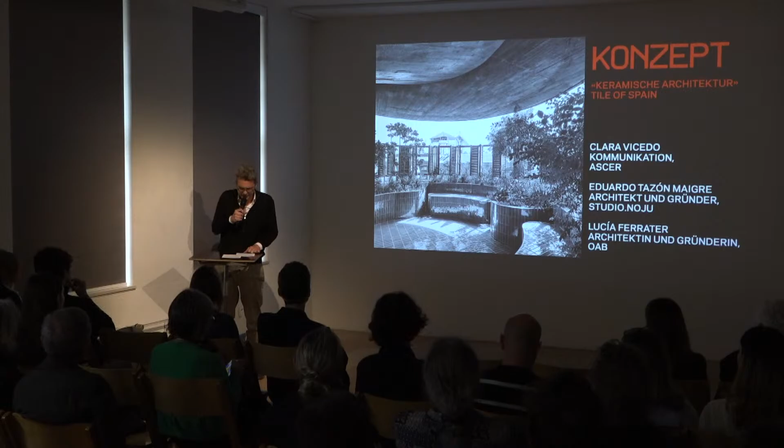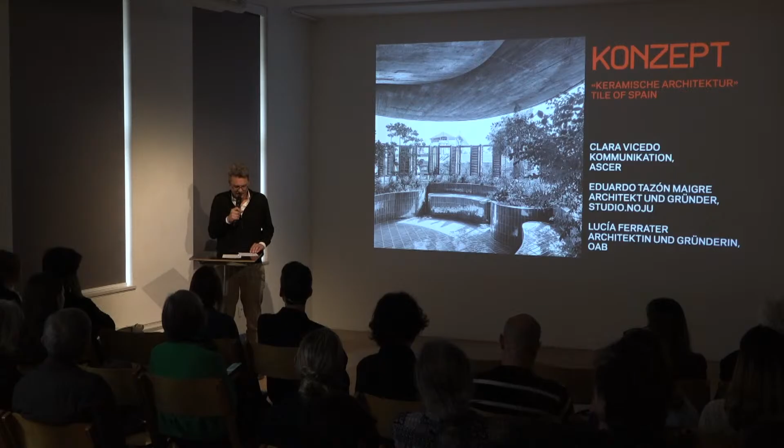So these are the two offices. Before I hand over to Eduardo, I want to welcome Clara Vicedo, who is responsible for communication at ASCER, the foundation that covers all the companies from the ceramic industry, and she will present ASCER quickly.

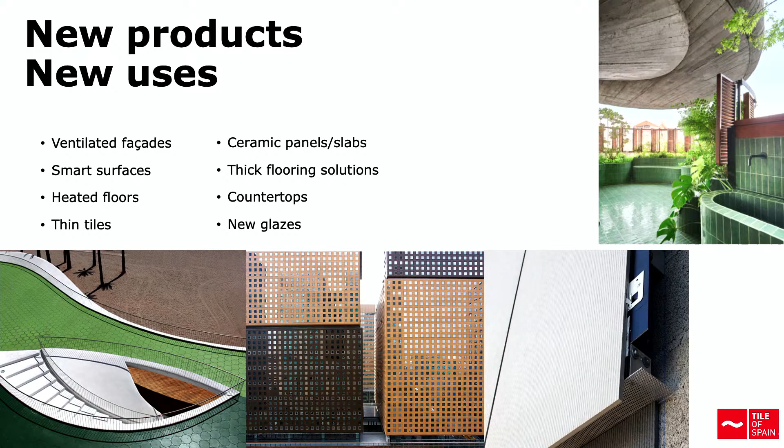The Spanish ceramic tile sector boasts a long tradition linked to an innovative industry and cutting-edge designs. Thanks to continuous investment in innovation and research, Spanish ceramic tile companies offer a wide range of products, from the very tiny mosaics to long slabs that can reach 3 meters long.

Without forgetting the special pieces of extruded ceramics or even the double thick tiles that you can lay on the floor directly. Depending on the manufacturing process, Spanish ceramic tiles can be used in interiors, exteriors, urban spaces, facades, countertops. The choices are endless for architects and designers.

Designers and architects hold ceramic tiles in very high regard, thanks to their versatility and beauty. Even though ceramic tile is one of the oldest materials in the world, it continues to impress people, to impress architects and designers with its potential and capacity for experimentation.

Related to this, I want to present the Tile of Spain Awards that we have been organizing for 23 years now. The awards recognize the best projects, national and international, that best use Spanish ceramic tiles.

These awards every year have a prestigious jury. We have had Carlos Ferrater twice as president of our jury. Last year we had Carme Pinós, and two years ago we had Herzog as president of our jury.

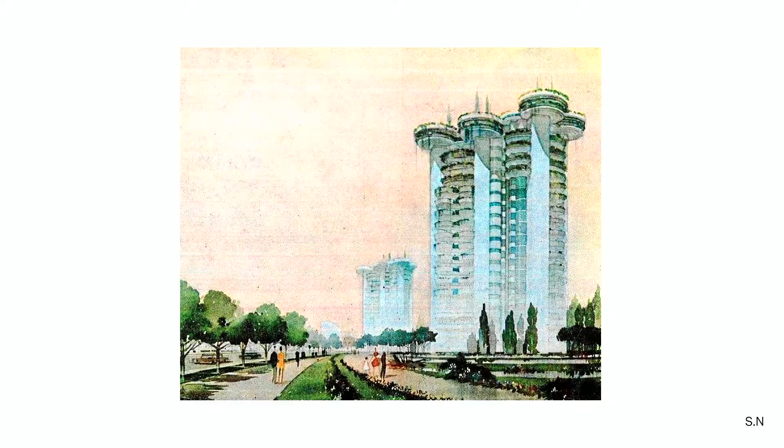Torres Blancas is a project which translates to white towers, which are not white, and they're not two, they're just one. Torres Blancas is a project by Francisco Javier Sáenz de Oiza. It was built between 1963 and 1969, and it sits in the center of Madrid, right at the old entrance of the city when coming from Barcelona.

It was a very fascinating project at the time because it was very forward-looking. The architect envisioned this project as an extension of the linear city, like a vertical extension of that typology of city, like the garden city going into its vertical axis.

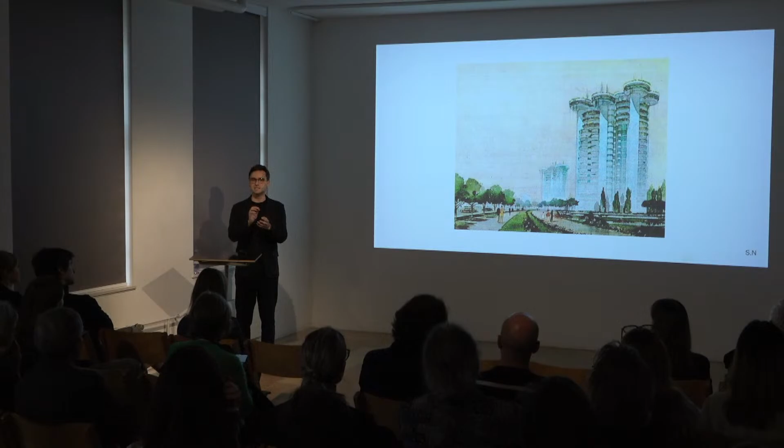We see this watercolor, and it's interesting because it was made to convince the city that this was a plausible project, that even though it was very utopian at the time, it still had the city's best interest in mind, in this new model of condensed city, a vertical hybrid of residential and commercial program. This was the watercolor that convinced the city.

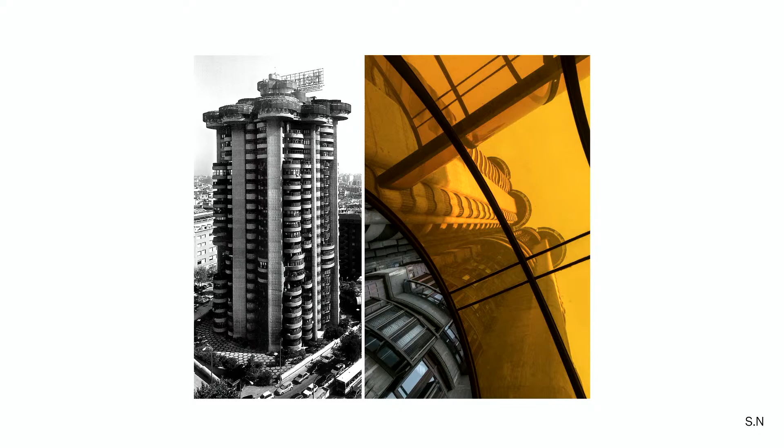Of course, you can already see that the original plan couldn't fully come into fruition because construction costs of such an experimental building were very high. The building is not just a landmark because of its architectural mastery of all the crafts and design—it was one of the first reinforced concrete projects built in Spain. So due to the experimental nature of the construction system, and also the formality of the building, it was very unique.

Construction costs had modified a lot the way that the project came out at the end. But even with all of these constraints, the project was extremely utopian and forward thinking, and a lot of the things that were planned actually came into fruition.

The architect envisioned this building—this is a quote from him explaining this idea of communal living, having all of this public program belonging to the tower. You could have a daycare center, a chapel, shops, restaurants, and a lot of those uses didn't end up happening because the space had to be leased to make it more financially profitable.

But two of the main ones, the swimming pool and the restaurant, actually did happen. There's a lot of architectural detail in the floor plan that talks about this idea of communal living—even the way the project was publicized at the time was extremely interesting and forward thinking. Let's remember this is the 1960s, and the idea of a mixed program in a tower now seems normal, but back then it was very forward thinking.

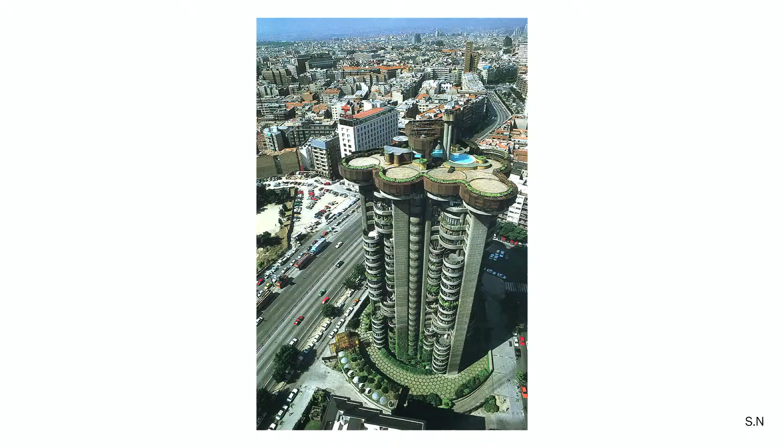Even the restaurant had its good run, like a decade or so. It was the Roberto de Nola restaurant, very high-end, exquisite cuisine, with 360 views of the city, which was very remarkable at the time. The interiors of the restaurant were even designed by the architect himself.

You can already see this formal language in the ceiling with this kind of reflecting paint, already transmitting the exterior language to the inside. Interestingly, one of the most fascinating facts about the restaurant is that it was able to send food to all of the apartments via a dumbwaiter.

All of the apartments had this tiny kind of dumbwaiter door, and they would be able to call the restaurant—again, 1960s, 1970s—and ask for a chicken and have it delivered down to their apartments.

It was very utopian because, when you think into the numbers of it, it was hard to serve the entire restaurant guests and also perhaps 100 residents at the same time. One reason it didn't extend its lifespan is because there wasn't a plan for its own elevator, so all of this public use of the top floors was very conflicting with the tenants of the building—they had to share the same 2 main elevators to access the residences and also the public program.

The swimming pool is still one of the highlights of the tower—very unique, great views, and probably one of the coldest waters you can find in a swimming pool in Madrid because it's very high up. But nowadays one of its main problems is maintenance costs, so it's important to highlight the importance of the tower and reclaim its importance as part of the architectural heritage of the city.

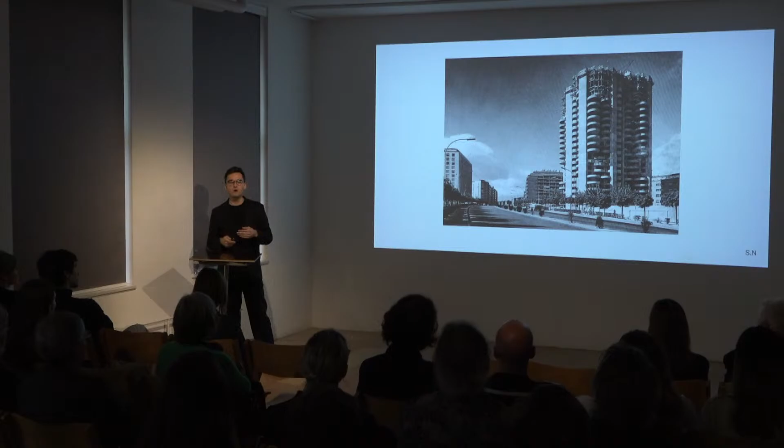During its very costly construction, a lot of changes were done to the floor plan layout. Initially there was a plan to have 16 units meant to be duplex apartments—400 square meters, 2 stories—and only 8 of them happened, because as they were building the tower they realized they needed to make it more financially viable, and substituted them for smaller 80 and 120 square meter apartments.

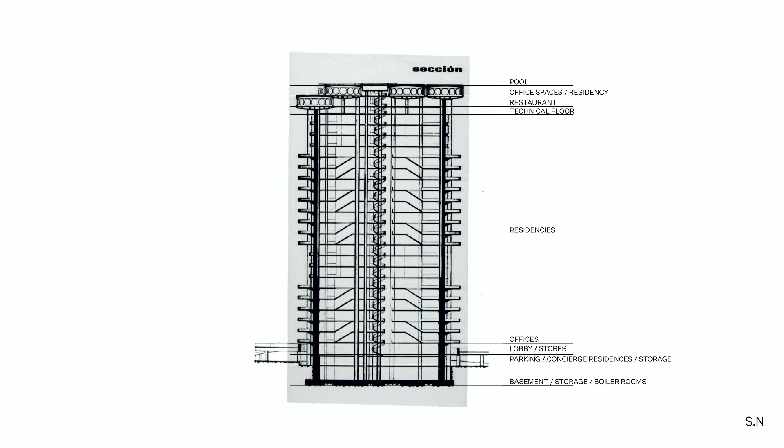Still, one of the most interesting aspects of the building is that it's able to condense different typologies of families and different typologies of apartments—going from the 80 and 120 square meter, which would be like an eighth of a floor plan, to a 200 square meter, which would be a quarter of a floor plan, or the 400 meter unit, which would take 2 quarters across different stories.

As you see in the section, the main residences would be like the core of the tower, and at the bottom, the lobby space—the way you enter the building—would be 1 floor down. He always said that to go inside the building, you first need to go down and then you go up. A lot of the public program was planned along the ground floor and also at the top floor.

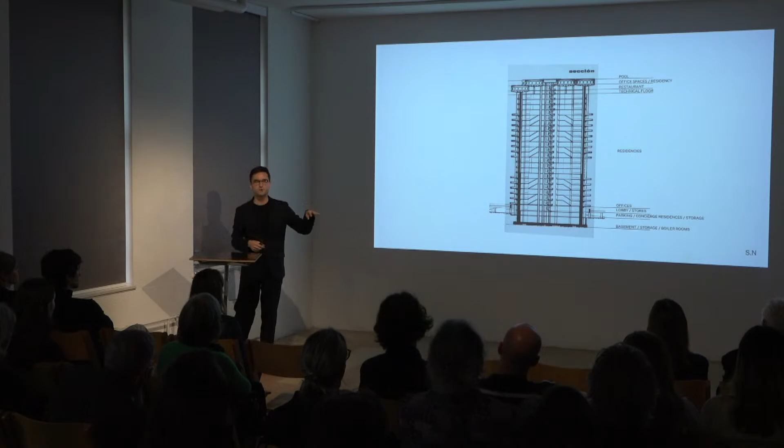Even though it looks very complex from the outside, the tower actually follows this simple diagram. All of the apartment units can be translated into an L shape that surrounds an outdoor space, because the outdoor space is going to be kind of the protagonist of these apartments.

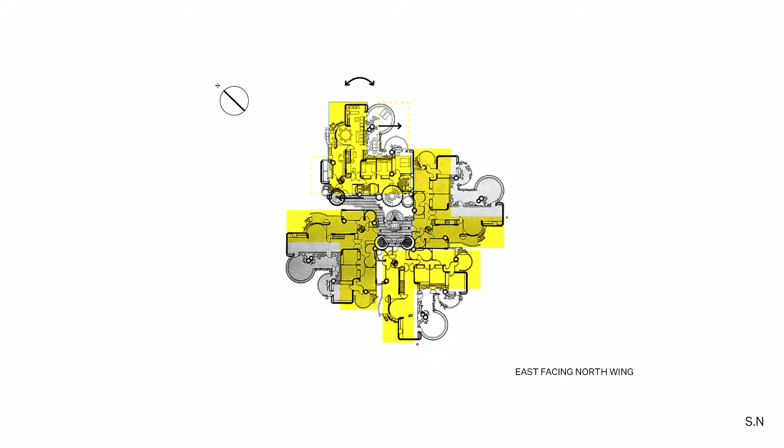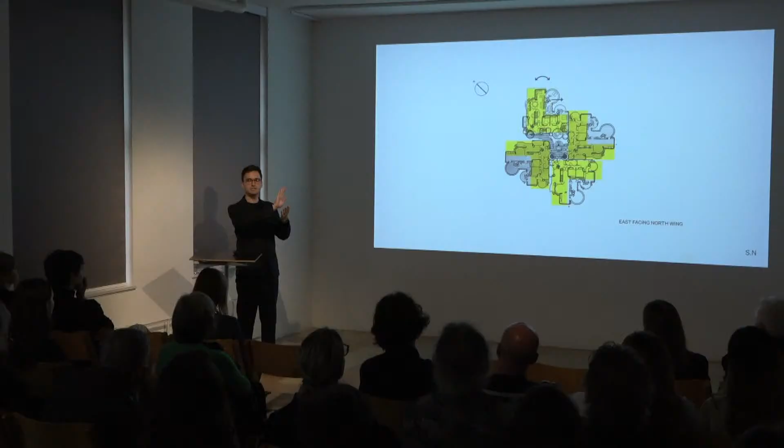As I said before, this was meant to be an extension of the garden city vertically, so the proportion of outdoor space versus indoor space was very important. This L-shaped apartment unit rotates from the east, south and west, but at the north unit, which is the one that we refurbished, it mirrors itself to focus the living areas towards the morning light of the east, and also leaves a bit of space for that corridor that leads to the fire escape.

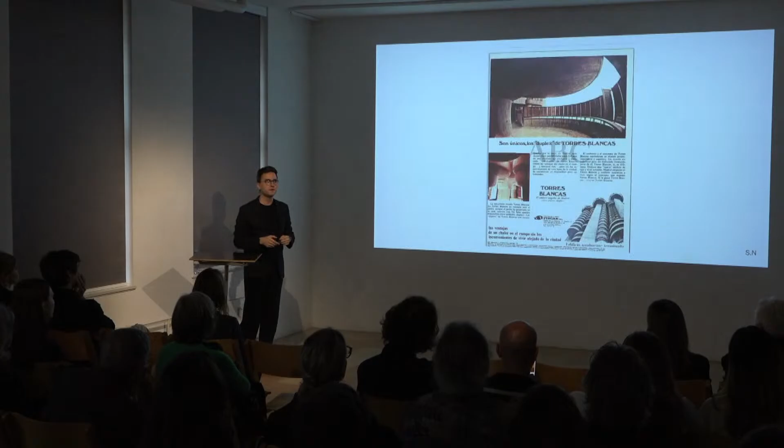Even at the time, these 2-story apartments were advertised as country town houses in the sky, because it was very unique to have such an amount of outdoor space for a flat in the city. Even nowadays, the amount of outdoor space these apartments have is still very unique.

Even the use of some of the materials chosen for this outdoor space really reminds us of those townhouses. This would be the only floor plan we were able to get before we started the project, because the project changed a lot during construction, and it's actually very hard to find as-built floor plans. So the unit, when we found it, was talked about as one of the apartments kept in its most original state—that was the premise of the initial floor plan.

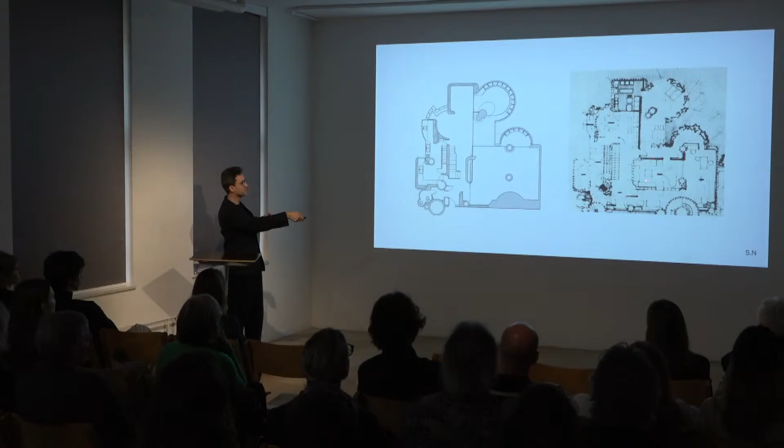But then we started to compare it to the original project, and we realized that all of that fantastic outdoor space that was meant to be the core of the house was completely gone. A lot of the terraces were turned into interior spaces, like this one here, where the line that separated the terrace from the living room was pushed forward, so you totally lose the connection between these exterior spaces. We already knew this was a heavily modified version of the original apartment, and these are spaces that were meant to be exterior.

This is the moment when we start to come to terms with how we can dialogue with such a strong architectural heritage. It's very nerve-wracking because it's a landmark in the city, especially for architects. We knew that we were not the nostalgic type, so preservation was not going to be a matter of keeping things exactly as they were 60 or 80 years ago. Instead, we wanted to focus on other values of the building and the apartment that are not necessarily listed within the preservation status.

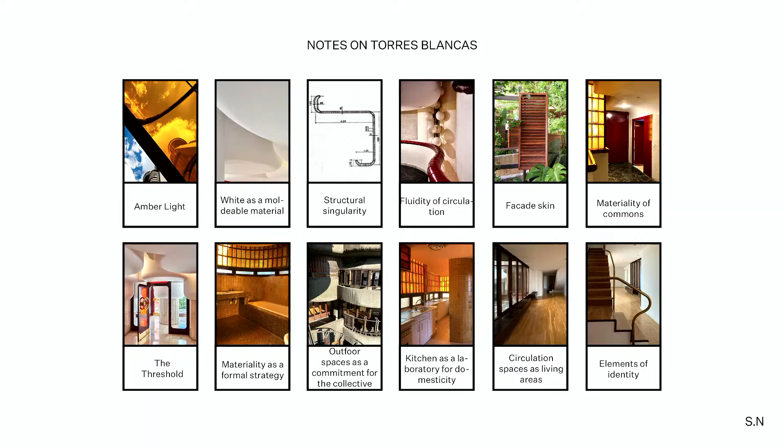Of course, we needed to comply with its grade 1 preservation status that protects the facade and the common areas, but there are a lot of values not listed within that catalog. For instance, the type of light that comes through into the apartment is very characteristic, and the whiteness is not just a color, but also a sense of thinking about a material as something malleable, which you'll see very well in the lobby space.

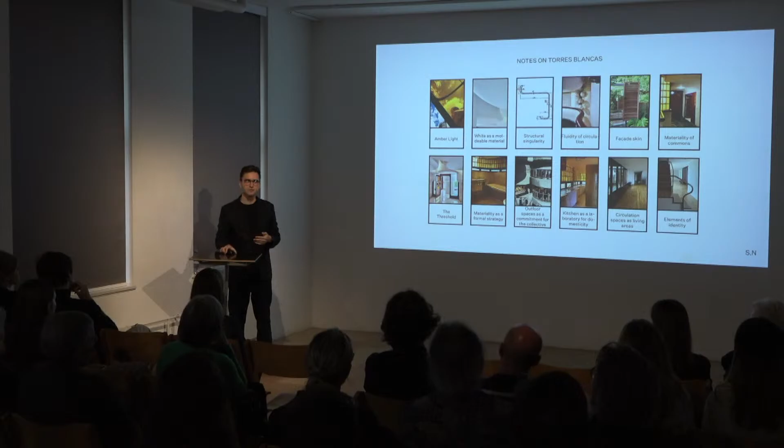There were all of these characteristics that we wanted to list, that belong to the essence of the building, and a lot of them were actually part of the architect's own narrative when he talked about the building. So rather than preserving everything as is, we wanted to have a new take on all of these existing values. We'll see that a lot of elements of the building will be transformed and reinterpreted in our proposal, without being nostalgic, but having a profound sense of respect for the building and the project.

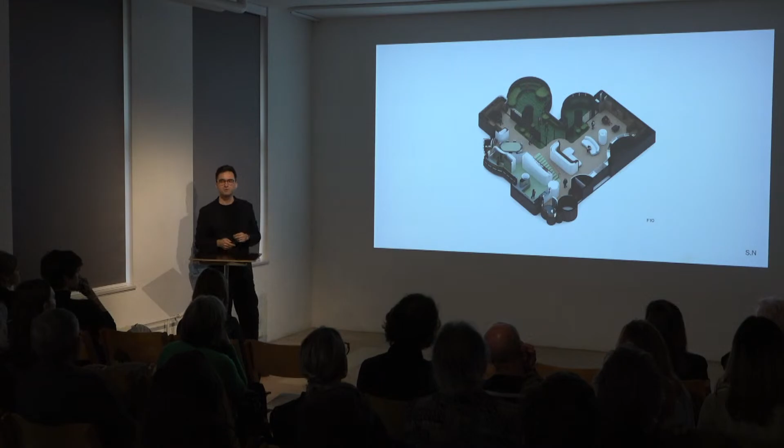So we're going to start diving into the renovation itself, starting with the ground floor. The ground floor layout and all of the program is still in the exact same place where the original architect planned it, and it was really well organized. Everything was really well proportioned.

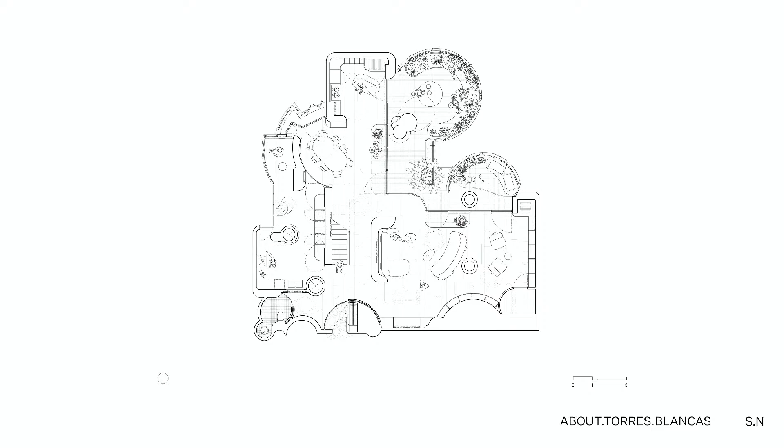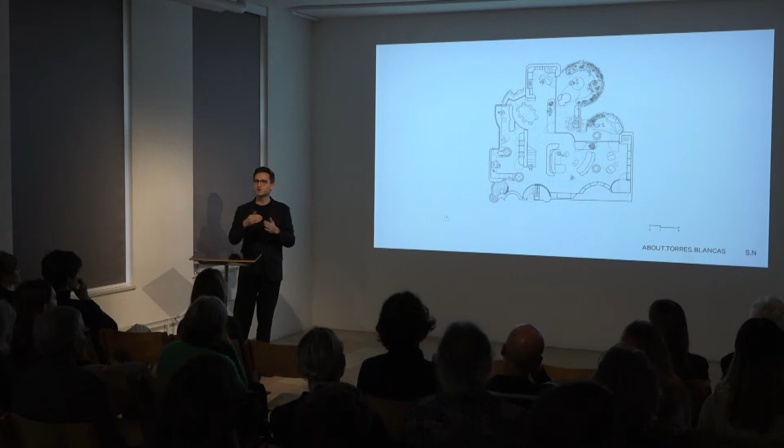So you think curved walls are going to be really hard to furnish, right? Where am I going to put my bed against a curved wall? Well, actually, there's a really logical and rational relationship between straight and curved lines, so whenever you need one, you're going to get a straight line.

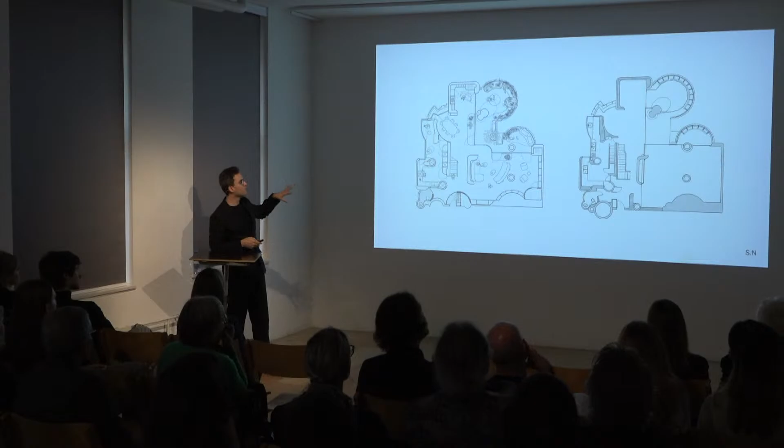And then we started to compare the existing state to what we wanted to conceive. So let's start diving into the project. The first space would be the entrance to the house.

The architect has this very interesting, convoluted but interesting quote about this idea of threshold, about how you design the architectural experience of entering a building, not just opening the door and you're already in, but something that had layers and different moments. For us, it was interesting to take this idea that already happens at the lobby space and, on a smaller scale, design a space that acts as a threshold dialoguing between the existing building and the renovation.

That's why we created this semicircle space that takes all of the visual cues of the common areas, such as this burgundy color, and even the floor is Segovian slate stone — we were able to find the original quarry where we could get the exact same stone. So we enter the house using the common materiality of the building as a way to dialogue between the building and the apartment.

There's a sliding curved wall that opens up once towards the apartment, but again, it's a bit of a threshold — it's not just walking into the apartment without any type of in-between. The next space that I'm going to talk about is the kitchen.

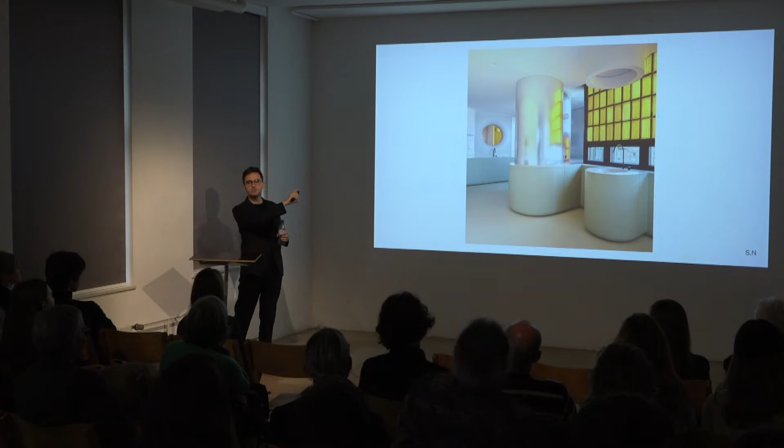One of those was to really experiment with materials, to achieve a formal language that resonates with the geometry of the building. You see the kitchen has this seamless resin floor that connects both kitchen spaces, and a countertop that follows the geometry of the existing structural elements. It's a beautiful floor plan, a combination of geometric shapes that are very willful but very intentional. So we followed this entire wall with the countertop.

The challenge was how to truly make this countertop seem malleable, in the same sense that the lobby space and other elements in the building seem like something you could softly push and mold. So using solid surface, we were able to craft this material so it could be curved in two directions, which was one of the challenging aspects.

Also, the baseboards are usually standardized aluminum solutions, but we wanted them integrated into the doors and into the design itself. Even the countertop edge is muted by a 45-degree angle. So just by designing that section, we were able to create this fluid object that goes throughout the kitchen.

This is the dumbwaiter I was talking about before. Some building tenants have it completely covered, some have used it as a library, but we wanted to preserve it and showcase the memory of that communal living, which is mostly lost now because the dumbwaiter use only lasted about 4 months. But it's still there with its original call buttons.

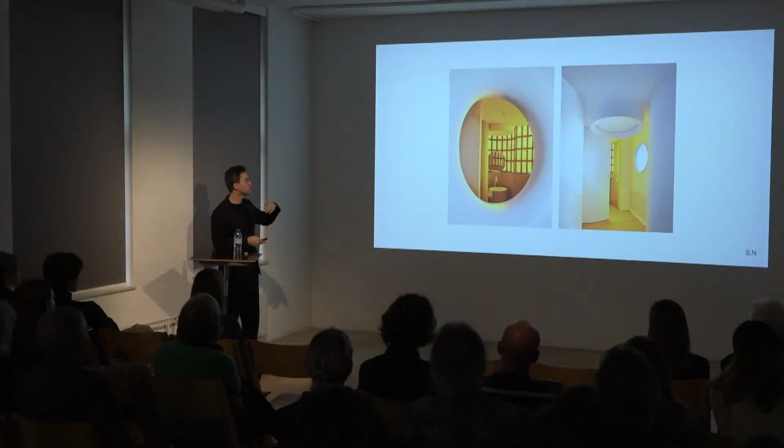This is like the image is reality, it's a beautiful light. So of course we wanted it to be part of the apartment. Previously all the service areas had no visual connection to the rest of the house, so we wanted to open up perforations and create this opening to frame that light and make it a protagonist once again. Even by using mirrored material on some of the kitchen walls, we're able to bounce back and replicate that amber light, making it part of the atmosphere of the apartment.

One of the debates at the time, with this indecisiveness about whether to open up the kitchen toward the rest of the apartment, was whether to isolate the dining room from the kitchen, the more conservative approach, or to open it up.

He ended up having the more conservative solution. So as a nod to his indecisiveness, we created this connection between both spaces with a sliding curved mesh door that somehow still visually connects both spaces and creates this sort of layered vision of both of them. Again, the connection between the kitchen and the rest of the house is highlighted and kind of cherished.

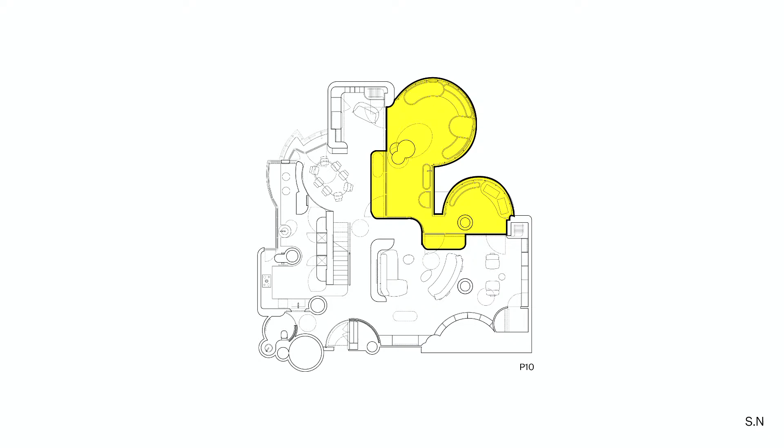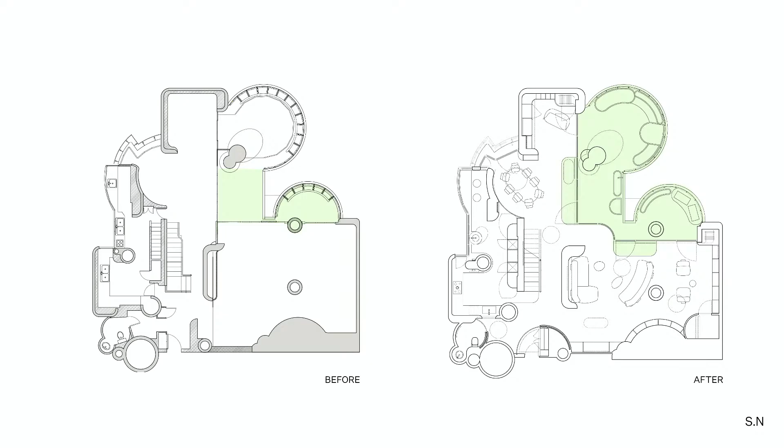And of course, then we move to one of the most important aspects of the apartment, which is the outdoor spaces. The architect even talked about these spaces as being like the core, the heart or the lung of the house, referring to the fact that these terraces should be covered in greenery. He envisioned the tower to be fully covered in greenery that stems from the terraces, so almost no concrete is left seen. But we encountered the fact that all of that space was gone.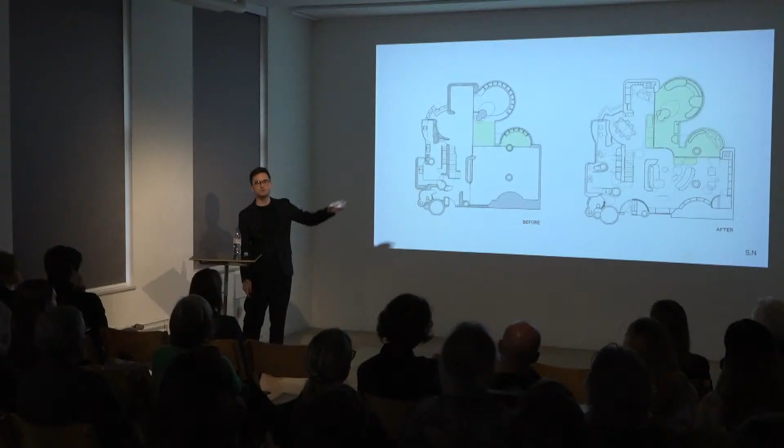We wanted to bring it back. This was kind of the state of those beautiful terraces - were completely given to the interior. Again, it was a common thing at the time, even nowadays, when it comes to real estate value - the more rooms you have, at least in Madrid, the more your house is valued.

And of course, these things are changing nowadays after we understood that outdoor space is much more valuable. So for the terraces, we really wanted to make something unique, something that stands out, not just keeping it as it was, but designing them as a holistic project, especially when it comes to materiality. Here we use these ceramic tiles of Spain, a beautiful porcelain tile that has this glazing that really reflects the lighting, and we created these planters and seating benches, again to highlight the formality of the space.

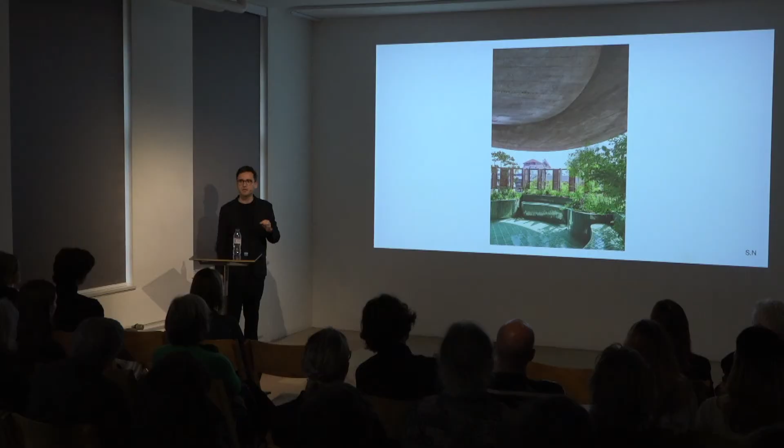This is kind of like a concentric meeting space, right? And we even used a lot of the plants that were suggested by the architect at the time he designed the building, so the plants would start to conquer the rest of the tower. This is very manual labor - each tile is placed by hand individually, and it's cut to shape. So it's definitely labor intensive, but for us it was important to make it so unique as to really claim its role as the heart of the house.

So all of the living spaces really open up towards that exterior. And you already see that the connection to the exterior doesn't stay just beyond the glass. Also the floor inside protrudes from the outside using the same tile and acts as a recipient of indoor plants, to change your plants in summer and winter. So the connection between spaces sort of blurs out, and that's the effect we wanted to achieve.

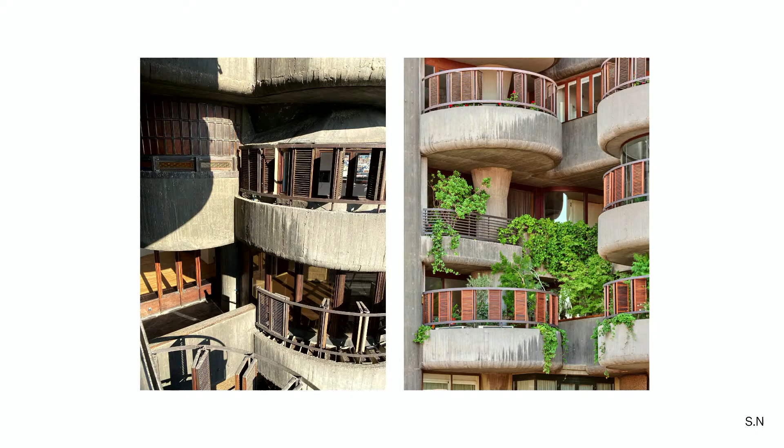This is what we found - this is the beginning of the recolonization by plants of the concrete. The rest of the floor plan is kept as a very open floor plan to truly highlight the fluidity that is a result of the very singular structural floor plan.

These in-between spaces are really trying to focus on creating that circulation. For instance, this connection didn't exist before, so it just ended up in a 90-degree angle wall. But we wanted to highlight the fluidity of the structural elements creating the circulation, so we opened up this curved corner using curved glass, and you see how the shape of that exterior space blends in towards the interior.

And all of the living spaces at the first floor are used inside of the open floor plan. We try to use wood as a way of framing certain spaces. So, for instance, in the living room, even though it's an open floor plan, the wood rises vertically and creates this backdrop for the sofa, for instance.

And then we created something that, again, wants to highlight one of these elements we thought was important, which we explained before - the amber light. This is another view of the living room towards the other side, and you see that we created this perforated paneling to disguise a lot of storage space.

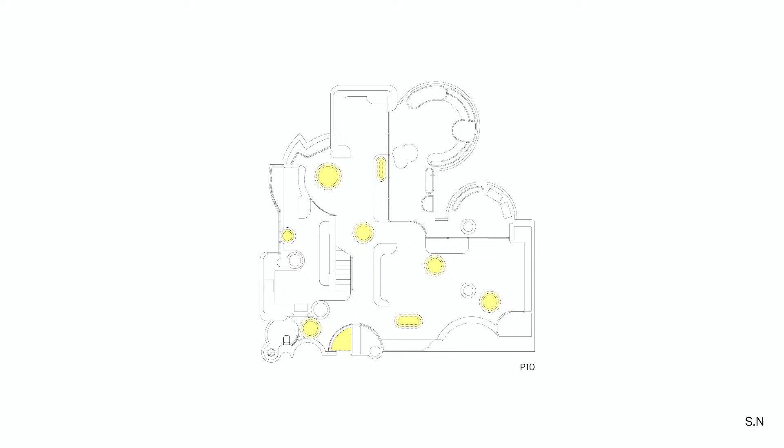Another nod to the building is creating these faux skylights that are a direct reference to the lobby space. The lobby of the Torres Blancas building is an absolute masterpiece, full of this cave-like plaster mold. The architect used to call them molars, because he created them after having a dream of having a lot of pain in his molars.

That's kind of the reference, but we see the image and think of it not just as formality, but also white again as something that's not just a color. In the white areas is where you see the material being transformed and molded. So that's when we started to think about these ceiling fixtures, which seem to melt from the material of the ceiling, as a nod to that idea we see in the lobby.

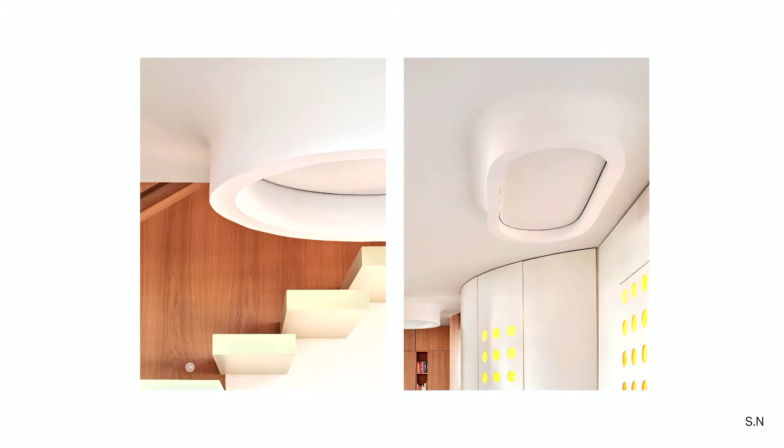And in this space, these light fixtures are meant to simulate outdoor lighting, the same temperature and intensity of light, to create the false sensation of having a skylight in a 10th floor apartment, which is right in the middle of the building.

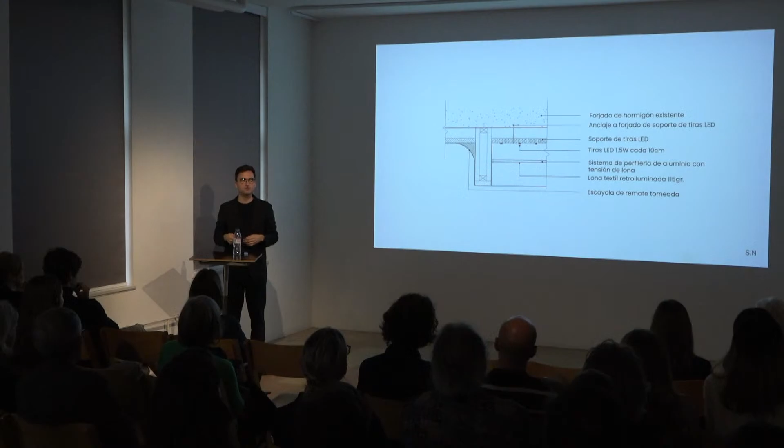But these were really a craft, there was a lot of craftsmanship behind it, from carpenters to lighting designers to plaster makers doing traditional plaster making. It was very challenging, but everything was needed to really create this effect.

Another nod to the building is its very distinguishable facade element, which is the wood shutters. The entire building, all of the apartments, have this layer of wood shutters, or mallorquinas, which is what we call them in Spain. And we wanted to reference those inside of the apartment as well.

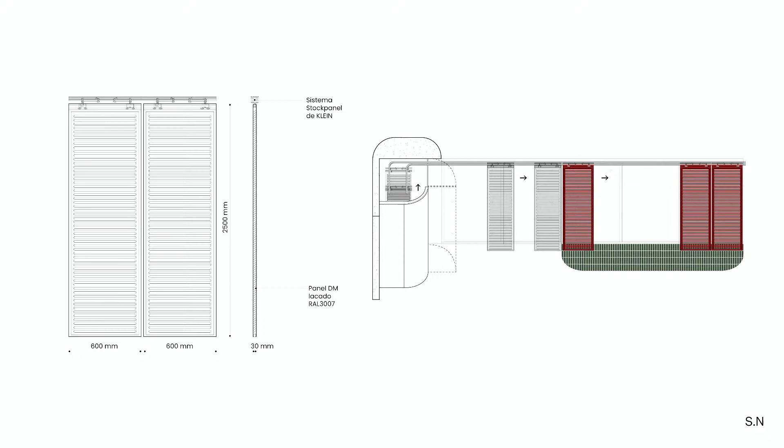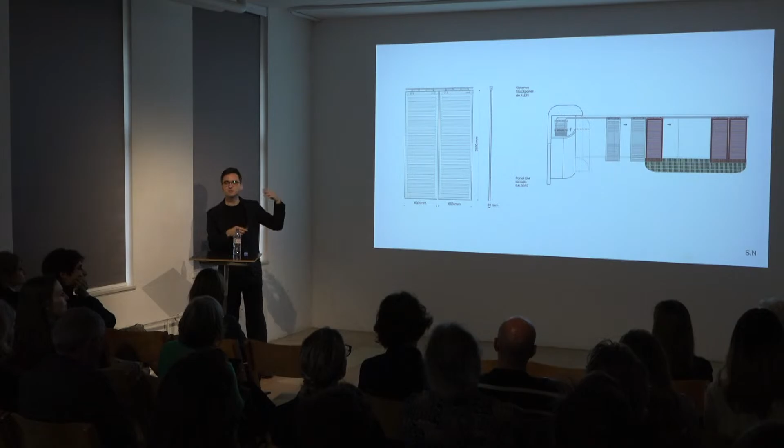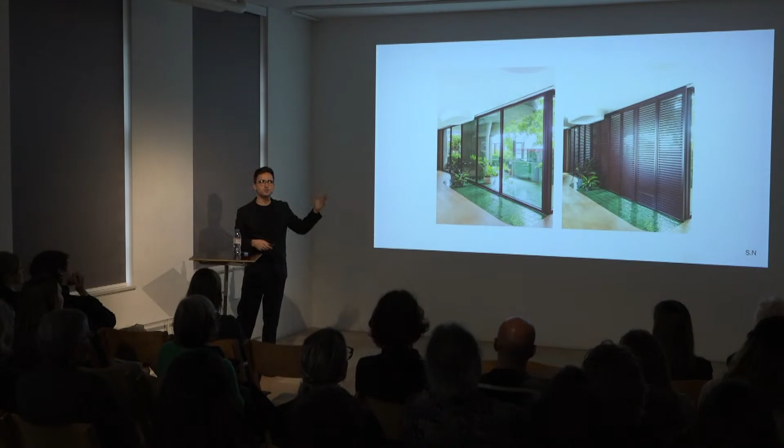So we created our take on those shutters. Instead of having curtains or just blackouts, we created this Mallorquina system inside that can be stored in hidden panels at the corners of the living rooms, using a rail system typically used in mobile partitions in big spaces. This references not just the wood shutters outside, but also reminds us of the original facade module, which was 60 by 60 centimeters. By opening up with all of this glass, we didn't want to lose that rhythm, so these shutters remind us of the scale of the windows back then.

Another small experiment is with the wood floor. The floor plan is an L shape, so when you have to choose the direction of the floorboards, it's not really clear, it could be both. So we opted for a very homogeneous looking wood that didn't distinguish too much between panels, and then we created these custom fake joints that resemble gestures from the floor plan of the project. This diffuses the directionality of the floor and adds another layer of complexity and richness to all of the elements of the project.

The staircase showcases the only element we kept from the original apartment, which is the handrail. Everything else you see is completely new. But the handrail seemed to have its own identity, and these polished brass handrails are used throughout the building. Brass is another one of the materials that are part of the identity of the building, and it's a direct reference that Oiza makes to one of his masters, Frank Lloyd Wright.

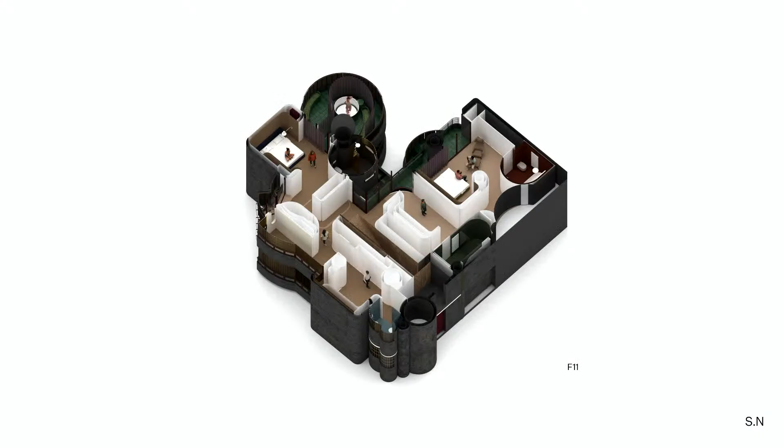Let's move to the second floor, which is where all of the bedrooms are. The layout actually comes from something the architect said about corridor spaces. Oiza said corridor spaces should also be living spaces — he wanted to promote the idea that you don't just have a hallway, that it needs to be part of a space that can be lived in. The truth is the layout he ended up doing, probably because of real estate value, ended up a very standard long corridor distributing to different bedrooms. So our idea was to go back to that original text Oiza wrote, to create a sequence of lived-in spaces that direct towards the main sleeping quarters.

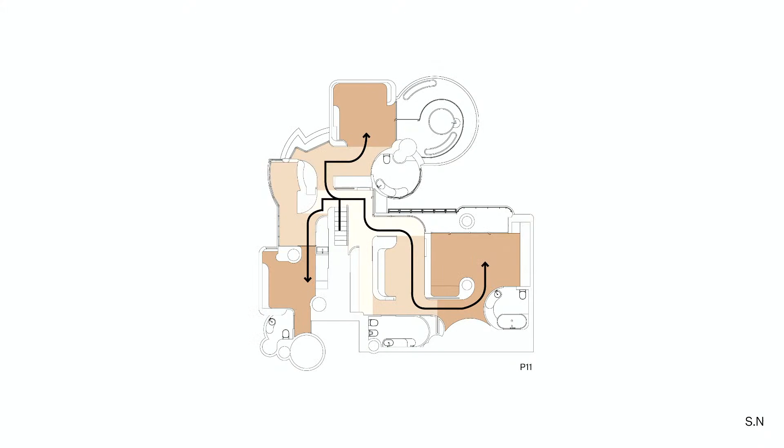So you walk through living spaces rather than just a plain corridor. For instance, this space acts as a day living room. It can transform into a bedroom because all of that paneling on the left is a bed that comes down, but it's also part of the walking area towards the rest of the house. These in-between spaces were important to us. This corridor originally had one curve — we turned it into four. It's about maximizing what was already there.

Even this nook that used to be where you hang clothes to dry, which seemed a pity because it's such a beautiful space, we turned into a small studio space that looks towards the city. It's really interesting because you only see the cityscape once you sit down, because the transparent openings are right at eye level when you're sitting.

And then, of course, we arrive through these intermediate spaces towards the main bedrooms. The house has two fixed bedrooms, using wood to highlight the backdrop and frame the beds.

And it has two of these versatile rooms — rooms that can be transformed easily into a bedroom, as a way of responding to different needs of the family. While it grows, you'll probably change — maybe you start without kids, then kids come, then kids leave. So in a way it's an adaptable house layout, a way to not always have four bedrooms in such a big apartment that always have a bed no one uses. It's important to think of that flexibility, and different types of families. Not everyone has kids — maybe they turn it into a workshop space, or a playroom, or whatever.

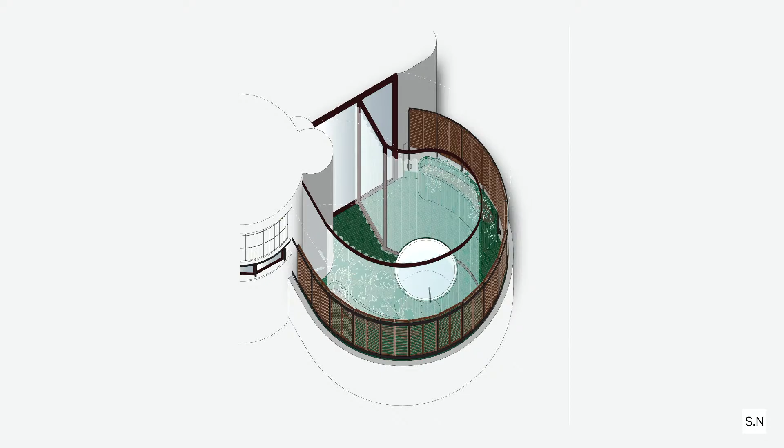The last space I'll discuss is the terrace from the main bedroom, which used to look like this, and now looks like this. We wanted to treat it as an exterior space, but also offer this in-between state of being an enclosed space with a very big bathtub, which you're able to close off with a very light curtain that resembles the green tiling we kept. The green tile had to be the icon of the outdoor spaces of the house. And again, the care in how this was placed made all the difference.

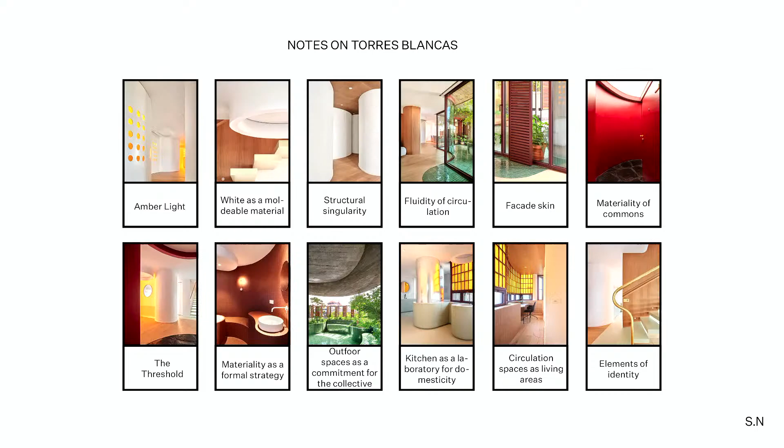We think we achieved at least the objectives we set for ourselves, which was to recover that idea of the tower being like a garden city, explored vertically and very lush. All of these ideas that were present at the beginning ended up being transformed and translated as a way to truly highlight our commitment to how important this building is. It's very nerve-wracking to intervene in such a landmark, but we wanted to showcase that the building still has a lot more years ahead. It's going to last for a long time because it allows for all of these modifications over time.

And we can stop the video whenever it's time. But yeah, I'd rather not see. Well, anyways... yeah, thank you. Thanks.

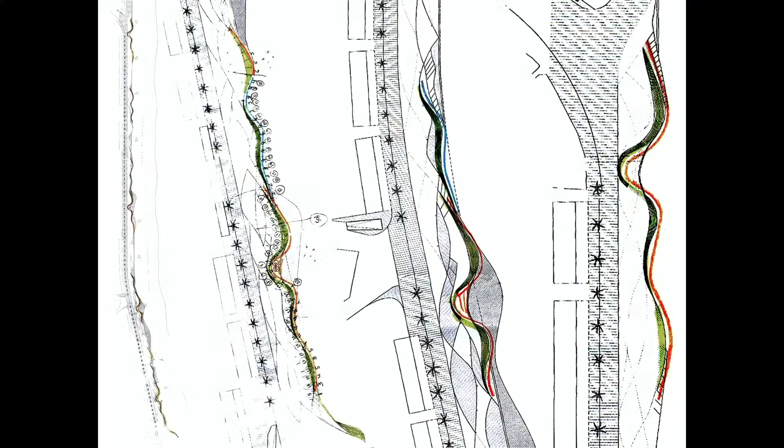These schemes come from an aleatory decision, but for the development project we had to establish fixed geometrical laws and modulation to make construction easier, and with a small number of molds and wooden frameworks we could combine them with each other.

The white walls are materialized in a concrete shell, a very thin shell 8 centimeters thick, reinforced with bar grids, fiber, and high-resistant and flexible mortars.

The promenade is structured in different layers: the structural layer that creates the perimeter line with the white concrete, the second is the texture layer with paving in different colors, and the third is the elements, the urban furniture, benches, hand railing, and the space of vegetation.

I would like to focus on the ceramic piece, especially designed for this project, and how a round shape tile has given the flexibility to adapt the surfaces to the topography and allows an isotropic space. Being circular does not emphasize any particular direction, which facilitates its placement by exchanging pieces of different colors along the braided pattern of pavement.

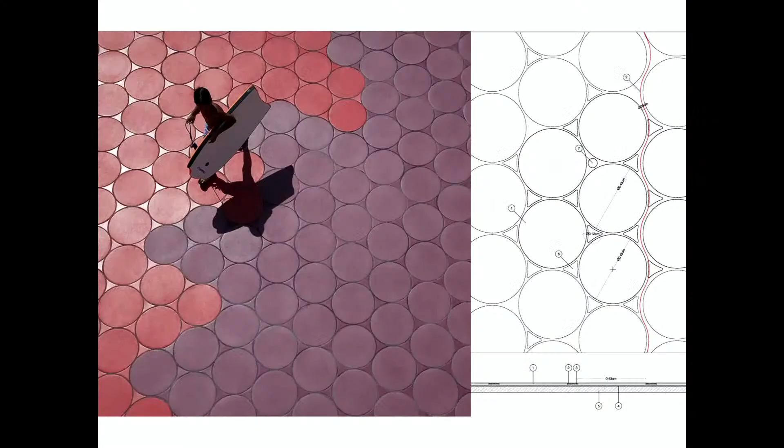We can see here the round piece. This color glazed stoneware floor was designed by Xavier Martí, one of the authors of this project, and was developed in collaboration with Alicer, Institute of Ceramic Technology, and produced by Keramia Company.

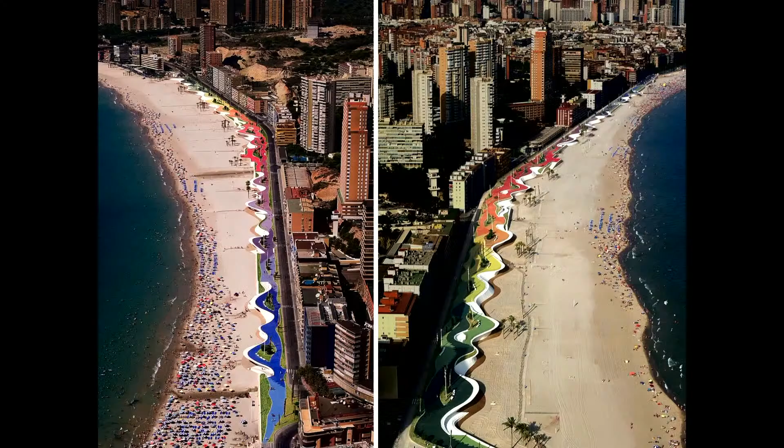The project subsumes three different essences within the organic forms of modernism: the forms of fractal geometry in nature, the latest building technologies, and avant-garde landscape design.

A new land-sea front is built, providing views towards the sea and beach from the upper level, and a new borderline is established, integrating the different circulation in its undulations and platforms, eliminating a barrier and constructing a place for people to be.

I can say also, for this project, the most incredible thing, and with projects above all these projects of landscape above all, is how a project can change the life of people, can change a place, and can transform it.

Benidorm has two beaches, west and east. The west was a very depressed beach, and no one went to the beach because all the shops in the front line were completely without business, without anything.

And this project activated all the life in this area. Benidorm, it's the beach, it's gold, it's the gold of the city.

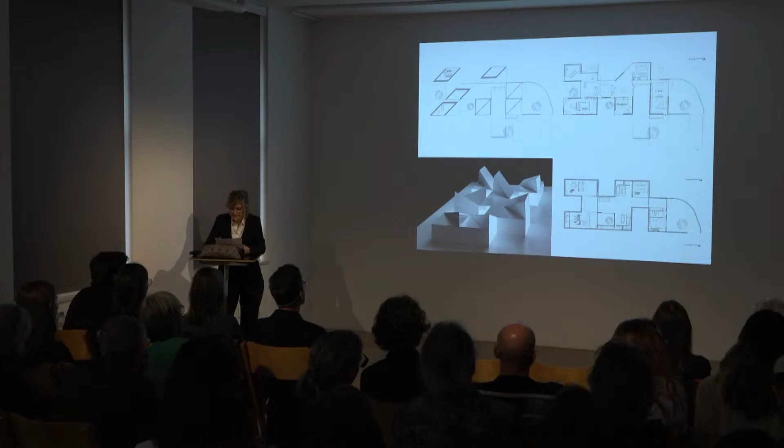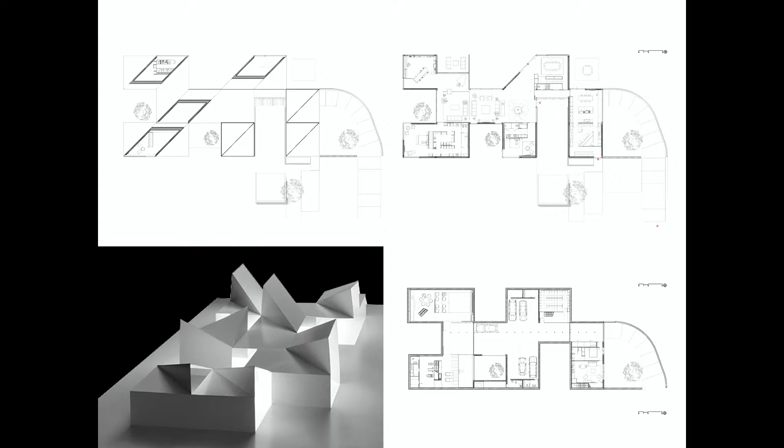Here you can see the floor plans. The ground floor contains the living, dining, kitchen, and two rooms for client and guests. I don't know how to explain it because you can see it more easily.

But every space of the house is totally linked to an exterior piece of garden, and this is very important—the garden comes inside the house.

From the inside, the diagonals disrupt the orthogonal layout, capturing views of the landscape and making the space more dynamic.

We can say that it's a house, but something else - it's many houses at the same time. It's more a pavilion. Here you can see the many houses. Japanese architects call it origami house, and now internally in the office we call it the origami house.

The connection of these two floors is not done through a main staircase, but 4 stairs connecting the different areas of the house. One stair connects the main room to the gym and swimming pool. The others go from the library to the cinema, or from the dining room to the wine cellar.

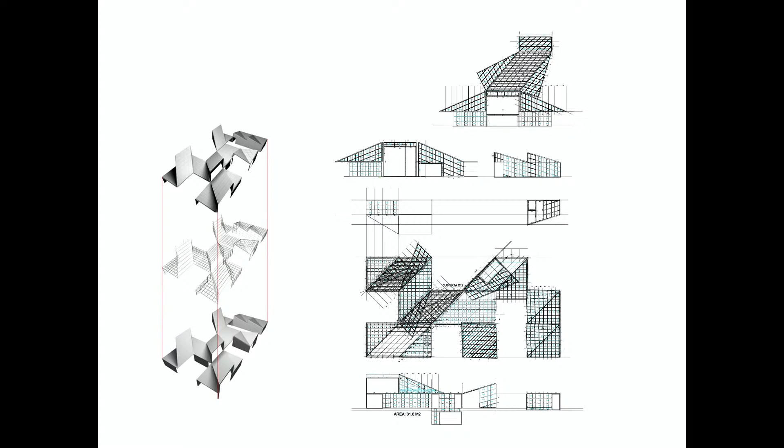All the slab, it's tension - post-tensing, it's post-tensing slabs. All the roof is a post-tensional slab. All of the roof, it's also, you can see a topography.

Then the third project, it's Roca Gallery, Roca Barcelona Gallery. We had conceived an institutional headquarters for Roca Company, a company that manufactures sanitary elements such as toilets, sinks, and also ceramic pieces. I think you know this company. The building had to be a flagship, and the architecture had to visualize the brand, advertising the values, the history, and the challenges of the company.

The assignment had to consider an institutional headquarters, a museum of the brand, and a platform for social events that also involves the business world. The architectural design is based on two essential ideas: its exterior appearance and the experience lived in the interior space.

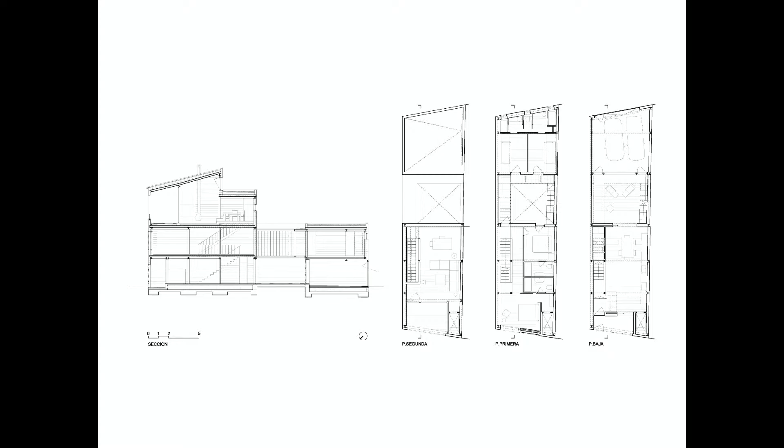The section is lower on the backside to improve insolation and ventilation to the courtyard, and the house faces north. The building in the back, the sun comes this way.

Inside, the house is distributed on 3 levels. On the ground floor, the house has access from both streets: a main entrance from the seafront, directly to the kitchen and dining room, and the patio and garage entering from the backside.

On the first floor are bedrooms, 2 interiors and 2 exteriors in the back building. The 2 interiors and 2 exteriors are connected by a hanging gallery, a hanging pasarela. On the second level there are the library, the living area, and a sheltered terrace facing the sea.

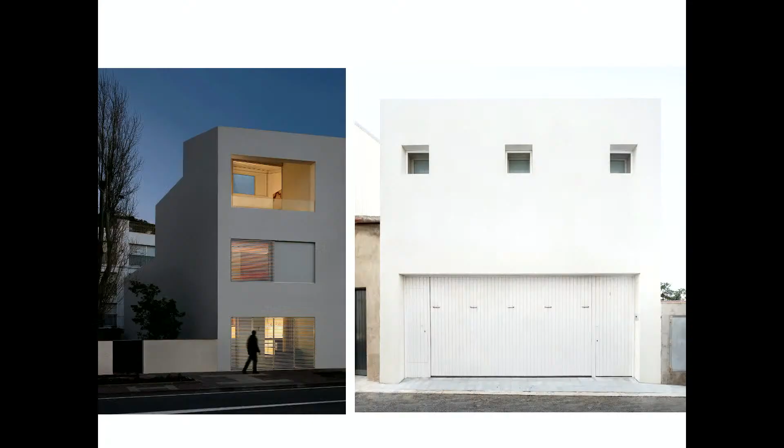The 2 facades, the front and the back. The patio, the courtyard with the hanging pasarela. It's a small patio, 6 by 5 meters, very small. But it's another living area of the house.

In construction terms, the house tries to economize as many elements as possible, recognizing the internal structural logic of its material. Inside, we wanted a naked house, we wanted to touch the materials. Inside you can see the structure in steel, cement, concrete block painted white, and ceramic, which is our traditional legacy.

This kind of ceramic tile, so traditional in our country, is not cheap but so simple. These materials, thanks to the light, manifest the most sensitive aspects to the interior. You can find only 3 materials: the block, the steel, and the collaborated slab.

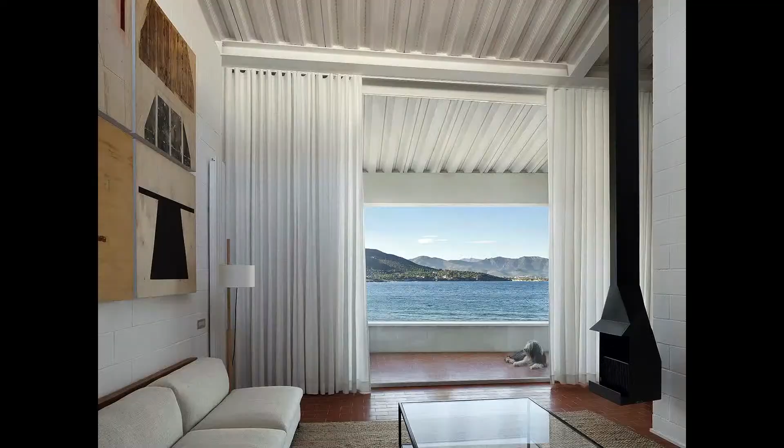I will finish with a video. This project and also the promenade in Benidorm both won the FAD Prize in different years. This one won the interior design award, and the promenade won the architectural award. And this is a video.

When we were confined for 3 months, we stayed in this house, and I think those were the best months in my life. Being with my children and the dog, facing the sea, it was an incredible life.

Because you discovered some corners that you never knew before. You discover the house in other months, in May, in March. Normally we go in summer and on weekends.